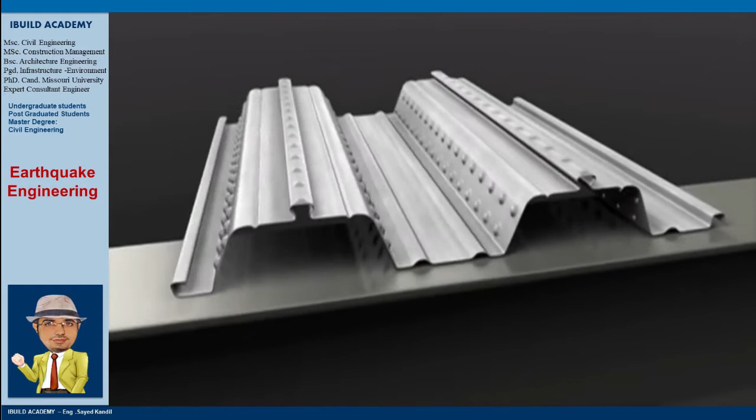ComFlor is a composite steel floor decking, ideally suited to modern high-rise structures. Available in both shallow and deep decks, the ComFlor range represents some of the most economical floor solutions and is arguably the most efficient choice of profile currently available anywhere in the world.

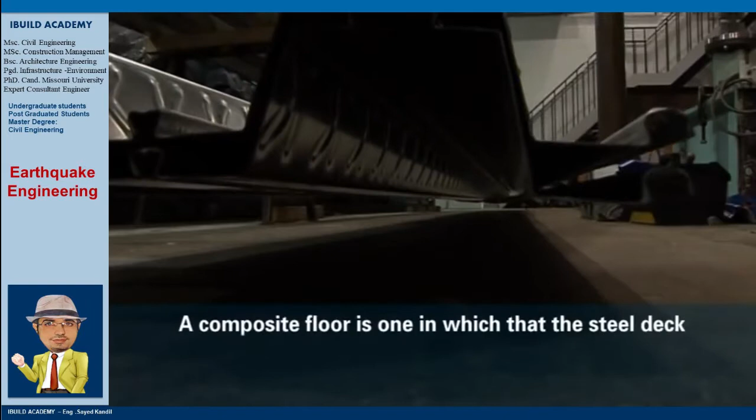A composite floor is one in which the steel deck mechanically bonds with the concrete topping, so that the steel and the concrete work together to form the floor structure. The technology reached the UK at a time when concrete had a dominant three-quarters of the market for multi-story buildings. The introduction of steel profiles using composite slab technology changed the market forever. And today, 70% of multi-story buildings are steel framed.

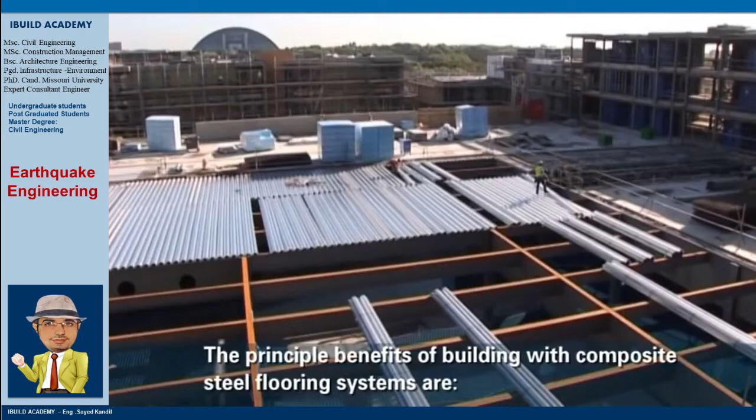The principal benefits of building with composite steel flooring systems are increased speed of construction. The deck instantly acts as a working platform. Construction stage bracing, providing diaphragm action to the floor. Reduction in the weight of the floor, overall building height reductions, inherent fire safety properties, and the simplicity of attaching building services.

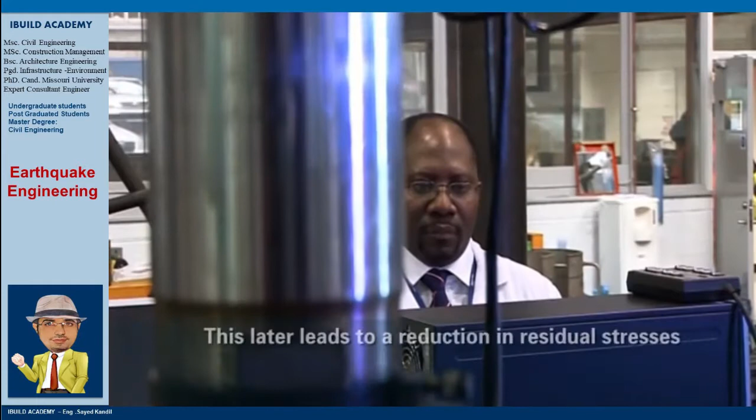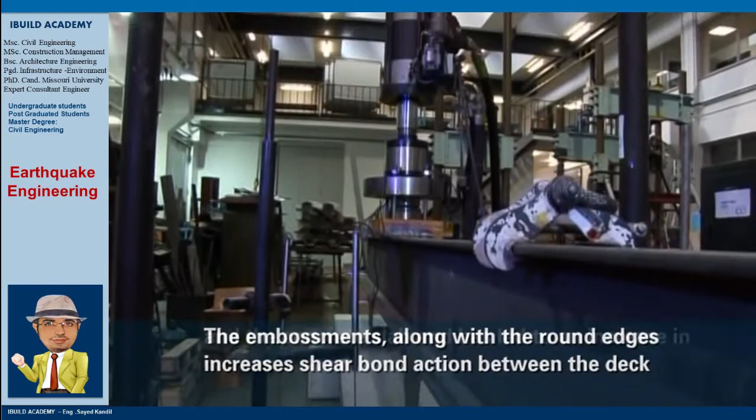Circular embossment in particular reduces the amount of distortion created during the rolling of the deck. This later leads to reducing residual stresses within the profile, which help the flatness of the deck. The embossment along with the round edges increases shear bond action between the deck and the concrete slab and has led to an increase in the M&K value found from the tests that were carried out here at Imperial College.

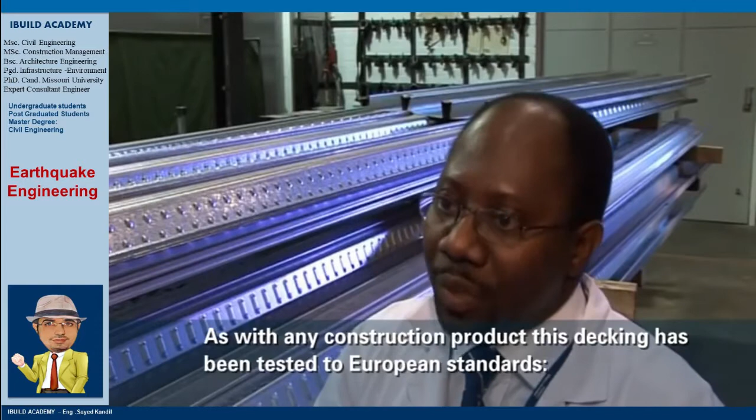As with any construction product, this decking is tested to European standards: Eurocode 3 for cold formed steel and Eurocode 4 for composite slabs and beams.

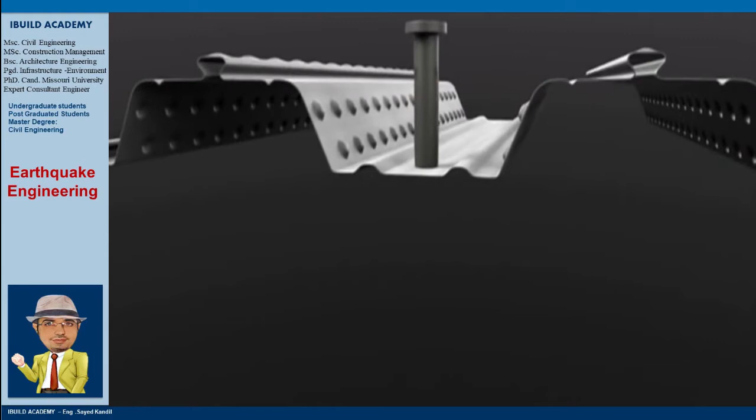The ComFlor 80 and the ComFlor 60 profiles were designed to span further in the unpropped condition than any other profiles in the world. Having a profile that spans further is only half the story though, because in floor areas where the spans are not so important, it means the gauge thickness can be reduced. Smaller gauge thicknesses mean that the overall floor cost can be dramatically reduced.

Deck design is not an exact science, however, one of the key areas for the design of these profiles is to try and ensure that the cross-section of the profile is fully effective. The introduction of the large corner radii is to reduce the individual element lengths of the compression zone of the profile. The CF60 and the CF80 have circular embossments.

The purpose of these circular embossments is to ensure that the concrete works with the decking. They put less stress into the profile, which actually means that there's no twisting of the profile. So when it's laid in situ, the decking actually sits firmly onto the top flange of the beam.

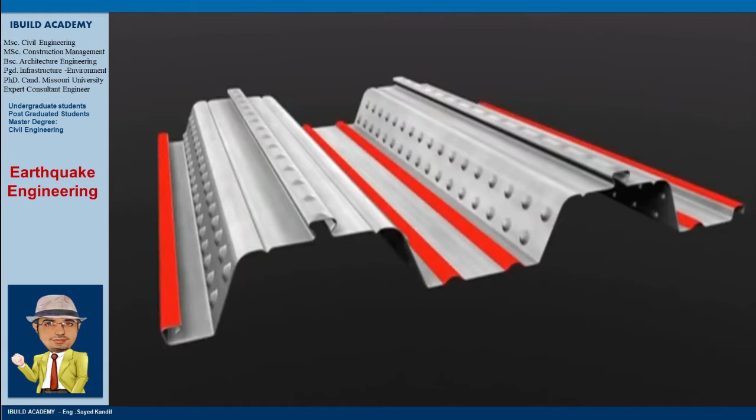When you look at the cross-section of these new profiles, you'll notice that the bottom stiffeners in the trough have actually been pushed apart, as opposed to a traditional central stiffener. By doing this, the shear stud connector can be placed centrally within the trough. And this means that the stud will achieve its full capacity.

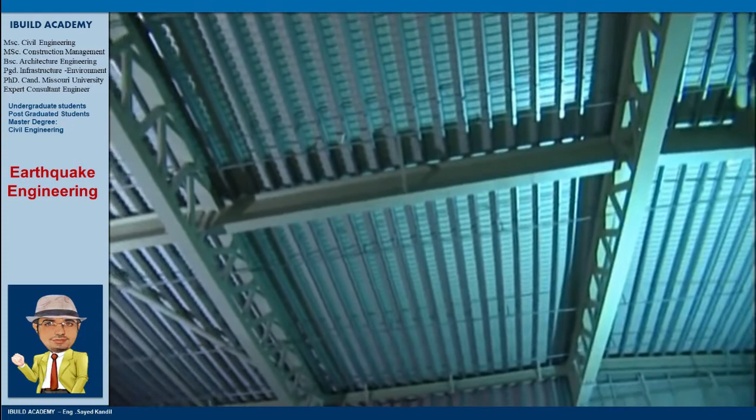Comfloor decking will span further than any other flooring deck profile. In the double span condition, Comfloor can span in the region of 4.5 to 5 metres without the need to prop. In a typical grid structure, traditional composite decks require a greater frequency of beams. The use of Comfloor can reduce the number of components by as much as 25%.

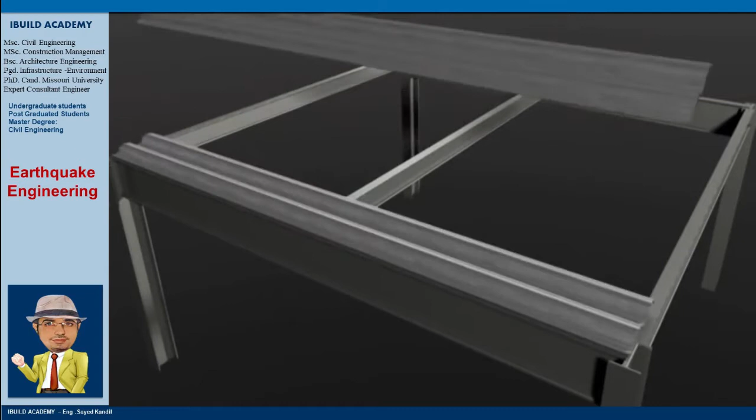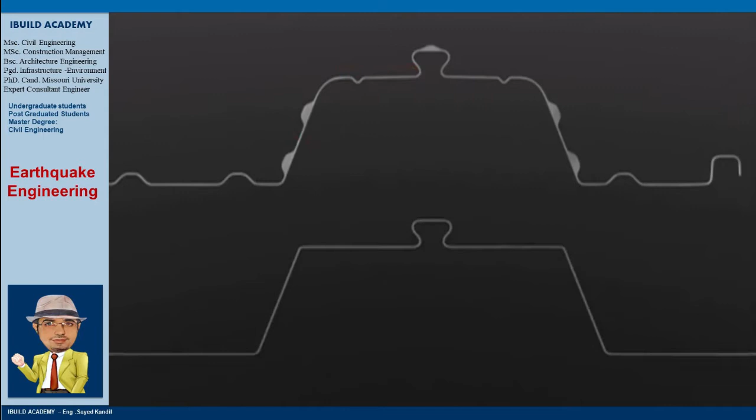Let's consider a typical crest configuration with a central stiffener. As the horizontal elements will at some point be in compression, it is important to keep the individual B/T ratios for these elements to a minimum. The location of the shear stud connector within the deck profile is of paramount importance. The latest Comfloor profiles only allow the studs to be centrally placed, which is the optimum position for developing the stud capacity.

Extensive testing and fire engineering work have resulted in fire ratings of up to 4 hours when using a light mesh within the composite slab and no protection to the deck.

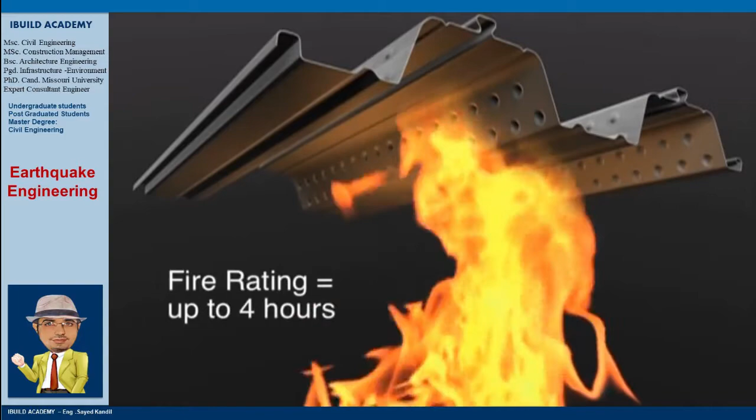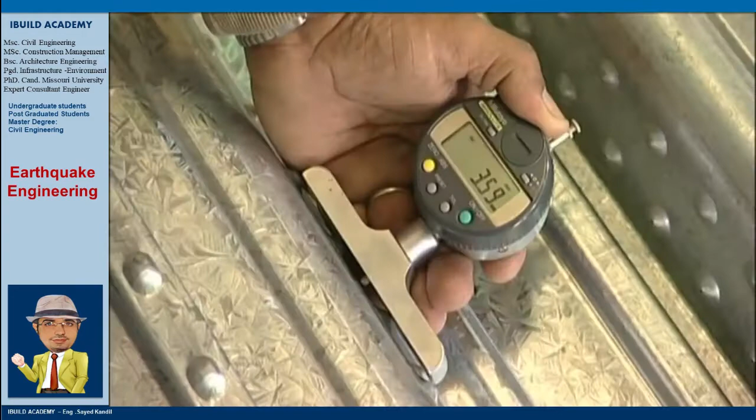We are proud that we have a very high quality controlled manufacturing process. At the beginning of each order, then at regular intervals, quality checks are carried out on the Comfloor. Only once these checks are satisfied will production continue.

Comfloor has gained great favour since the launch of Comfloor 80 in 2004, with hundreds of thousands of square metres supplied all over the globe and demand only growing as the world realises the great benefits of the Comfloor composite floor system.

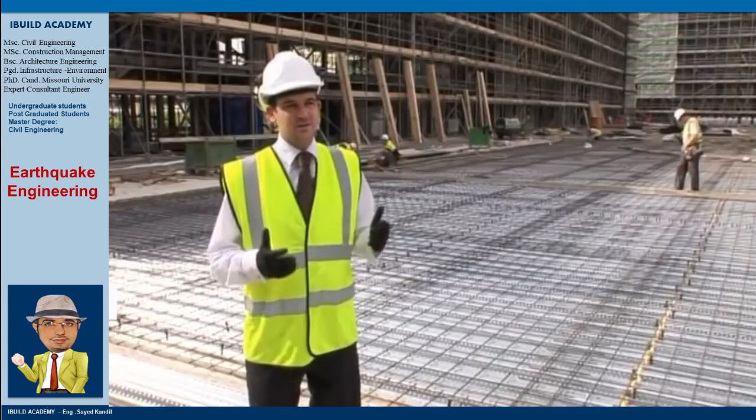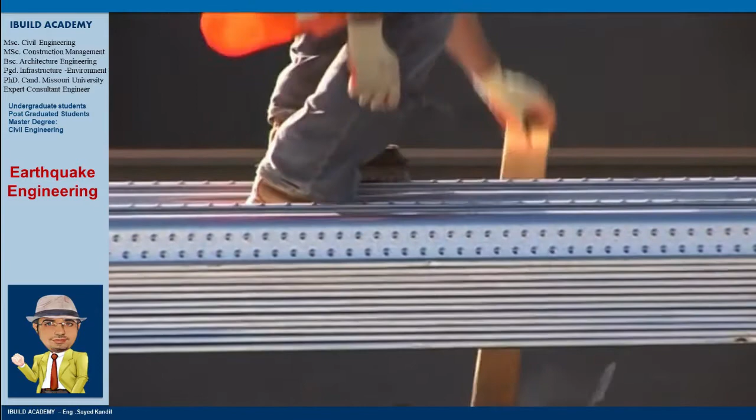Essentially, it starts when we've got our steel frame erected, and obviously we hang safety netting beneath the floor where we want to be working. The steel composite panels come in bundles on the back of a flatbed and are lifted onto site by crane. Typically we take from these bundles of, say, 15 sheets, they're placed in position and then fixed to the beams.

Once the deck is laid in position, it becomes a working platform, but also a crash deck, allowing work to carry on unimpeded on the levels below. The shear studs are then placed in position through the deck, welded onto the composite beams. The steel mesh is then laid, concrete poured, and then it's finished.

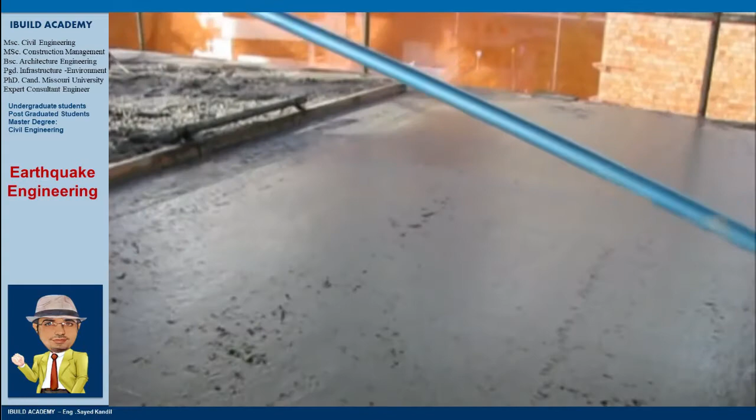ComFlor is a high-quality composite decking product, manufactured with tight controls on testing and packaging. It has been proven to provide significant savings in both construction time and overall structural costs in buildings all around the world.

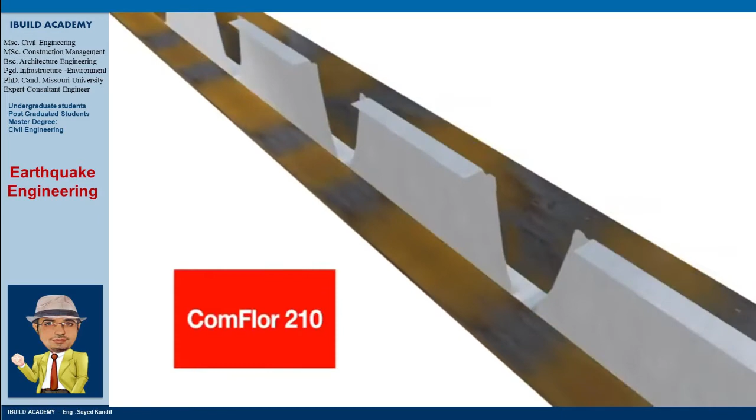ComFlor 210 was introduced to the New Zealand market in 2002 and has been used in the United Kingdom for over 20 years. ComFlor 210 is best used in a single span configuration where the 210mm deep profile is fully or partially incorporated within the height of the supporting beam, resulting in a reduced storey-to-storey height when compared to using metal deck laid directly on top of the beam.

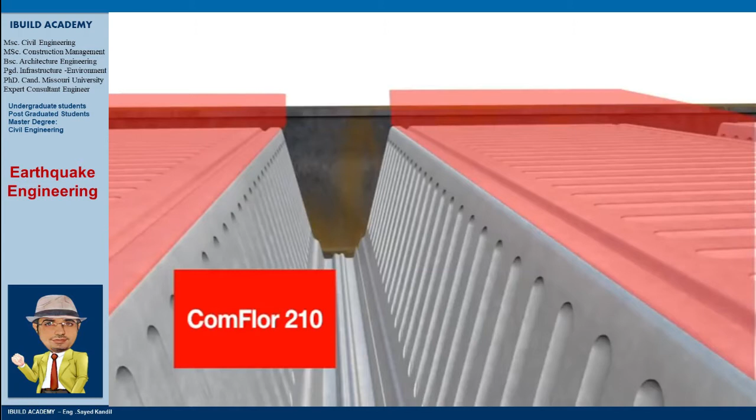ComFlor 210 is very economical in terms of concrete volumes used. This is due to the deep beam-type troughs that provide the spanning strength, while the broad top of the profile minimises the amount of concrete used overall. ComFlor 210 suits construction that requires large spans, but also demands a thin overall floor system, that is the total floor system height inclusive of the beam.

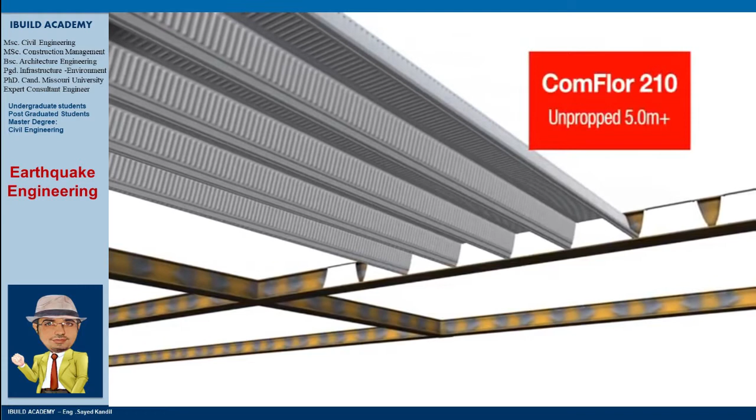ComFlor 210 has the longest unpropped spanning ability, over 5-metre beam centres. When temporary propping is used, spans of over 8.5 metres are possible.

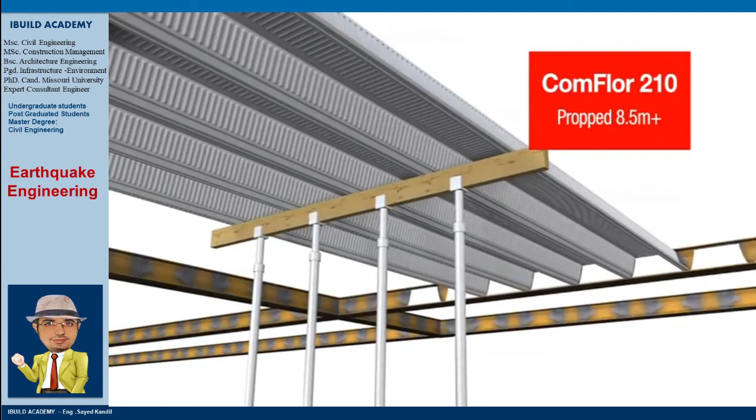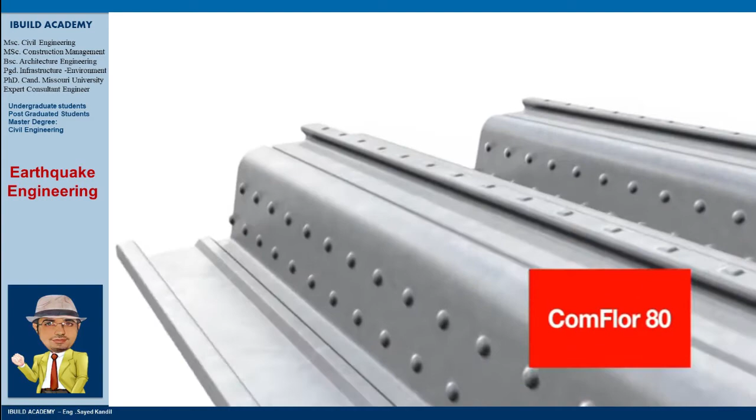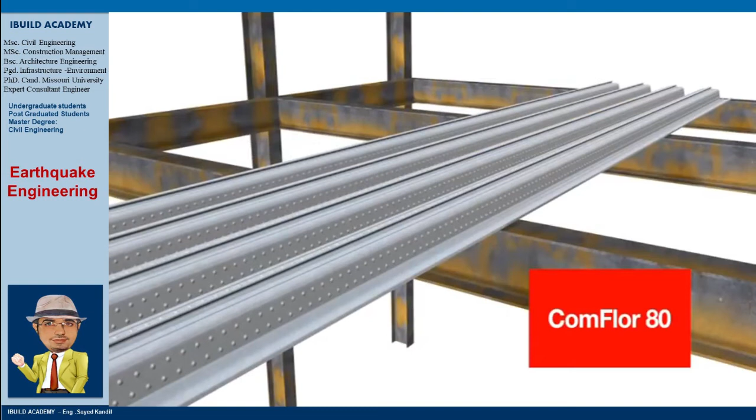ComFlor 80 was introduced to the New Zealand market in 2005 and has been used in the United Kingdom since 2004. ComFlor 80 is best used where long sheets continue over multiple beams to fully utilise the fantastic spanning capabilities and construction bracing properties of ComFlor 80. As such, it suits high-rise construction and where a simple, large spanning and lightweight flooring system is required.

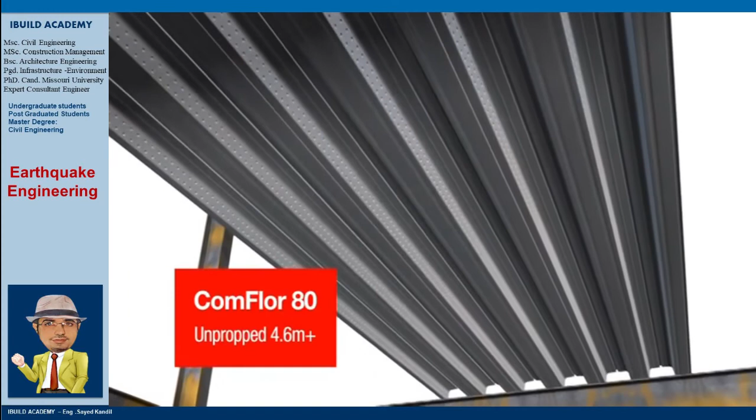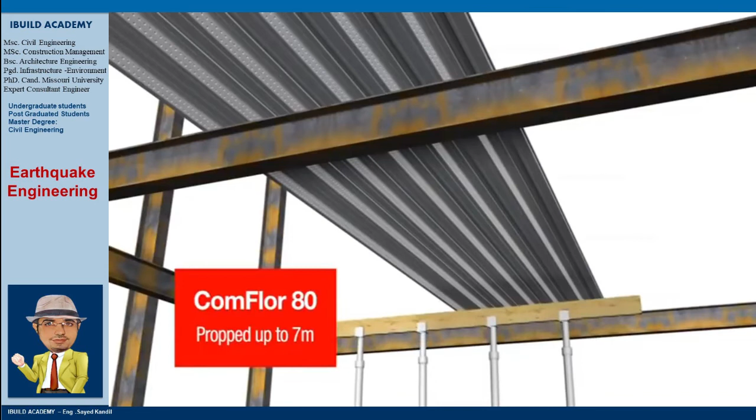ComFlor 80 is a great balance between economic concrete use and robust acoustic and fire performance, achieving 4 hours in fire testing without any modifications to the underside of the decking. ComFlor 80 can span unpropped to over 4.6-metre beam centres. When temporary propping is used, spans up to 7 metres are possible, meaning ComFlor 80 is a great all-round choice for your project.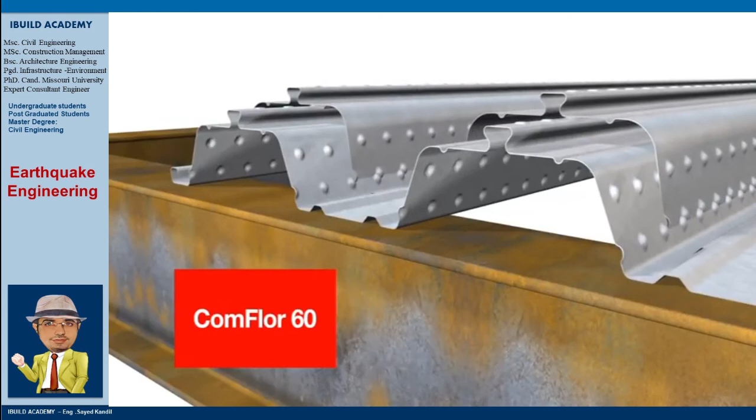ComFlor 60 was introduced to the New Zealand market in 2008. ComFlor 60 is similar in use to ComFlor 80, but is better suited when the thinnest possible slab is required or where acoustic, fire and vibration criteria are critical factors in the design. Using less material width in its manufacture, ComFlor 60 also comes at a lower unit cost than the ComFlor 80.

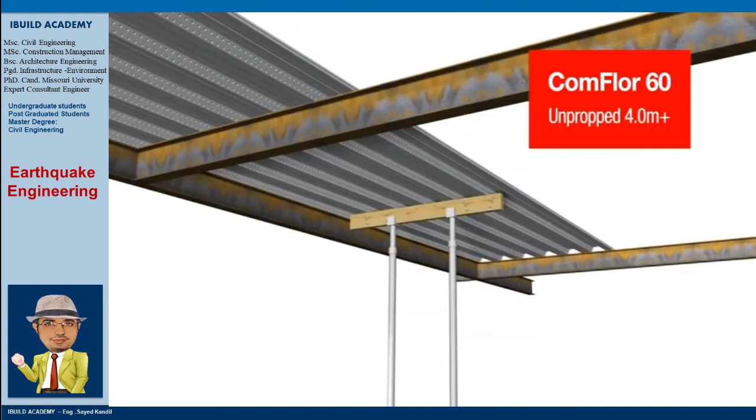ComFlor 60 is great for commercial car parks and storage units, or anywhere a long-spanning, concrete-efficient slab is desired with good solid performance characteristics. ComFlor 60 can span unpropped to over 4-metre beam centres. When temporary propping is used, spans up to 7 metres are possible.